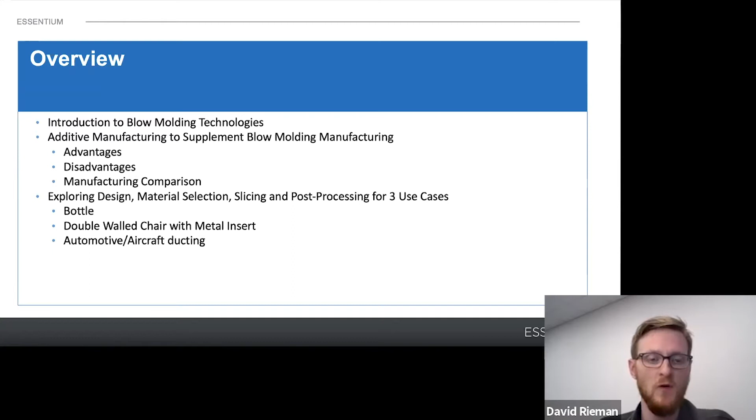So what is blow molding? It has been around for a while. In its simplest form, it is sort of the natural evolution of glass blowing. The first step that started getting blow molding running was in 1933. Low density polyethylene, LDPE, was invented. It wasn't manufactured and built until about 1938, where the material was much more amenable to the blow molding process. So in 1938 is when the very first blow molding machine is produced and able to start producing parts.

It doesn't really take off, though, throughout the 40s. There's a few people that are using it, but for the most part, it's not quite very popular. In 1953, high-density polyethylene is invented, and that's what really kicks off everybody being really interested in blow molding in terms of how it can be used for a variety of different products. That's where the industrial blow molding machines were first developed in Europe. And then those machines became available in the United States in around 1958.

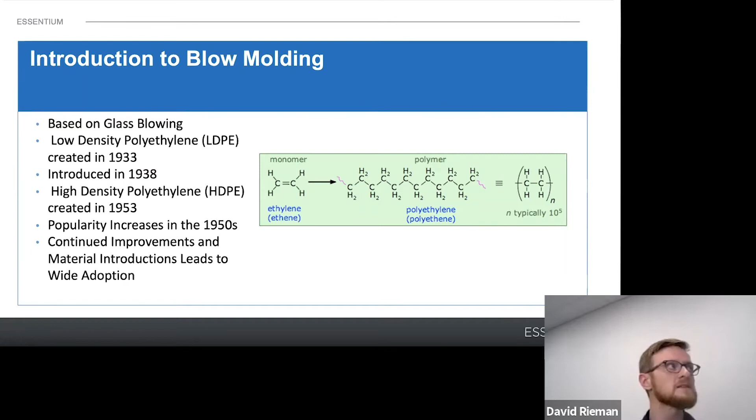So here is a breakdown of the different types of blow molding that we have. The most common is extrusion blow molding, where the material is... I'll get into that in my next slide.

But some of the main advantages of blow molding are that it's got very fast production rates. You can mold very complex parts at a relatively low tool and die cost. The molds will generally last the lifetime of your production cycle, as there's a lot less wear on blow molds compared to injection molding and other plastics manufacturing. There's a relatively low cost for high volume production parts, and the parts can be produced with a high strength to weight ratio. Parts can sometimes be reinforced with a lightweight foam core or internal ribs.

Some disadvantages of blow molding are that you're limited to creating hollow parts. It's also difficult to control wall thickness, and you have to take really great care in your design and equipment operation to ensure you get as close to a uniform wall thickness throughout your part as possible. Compared to injection molding, you do get poorer surface quality on blow molded parts. That's why, when we get to it later, post-processing is going to be such a key factor for anything concerned with blow molding.

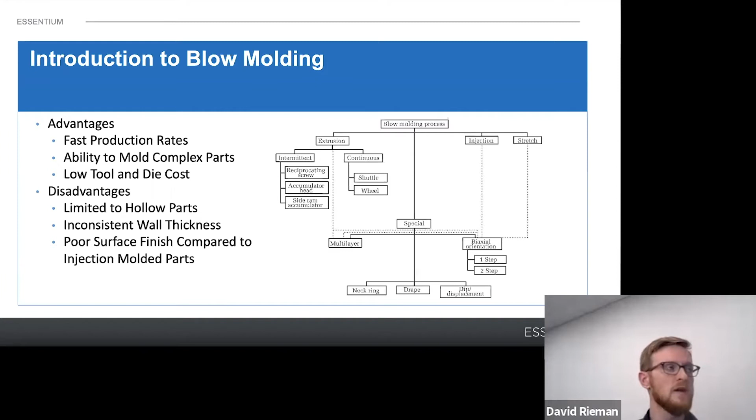Next slide. So this is the basics for extrusion blow molding. On the left, you see a picture of the basics of it. The resin comes in, just like with any typical plastics, and much like injection molding, it gets heated up and forced along an extruder screw, and that takes it to the die head.

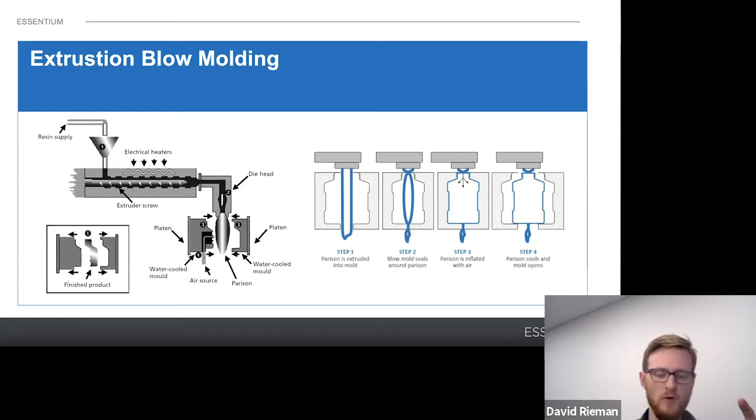At this point, the molten plastic is forced out through this die, and it creates an object called the parison. The parison is just a hollow tube of really hot heated plastic, and that is what gets grabbed by your molds. That's what the diagram on the right shows: the four-step process where the parison drops down, the mold grips it, and either through the top or the bottom, or sometimes even a hypodermic needle, air is inflated into the parison. As the air comes in, the part cools, then the molds release, and the part is ready to be used.

Next slide. So the next type of blow molding is probably the one that everybody is most familiar with. This is the process that makes all the soda bottles, all those PET bottles throughout the world.

In this process, much like that first step where the resin is melted, instead of being forced through a die head like before, it actually forms something called the preform. Some manufacturers produce a lot of preforms that can then be bought and used, and some machines will have the preform stage as part of the entire assembly line, where it makes the preform, rotates it over into the blowing phase, and then into the cooling phase for ejection.

So you can see here that on the left side we have the preform, and then it gets grabbed into its mold. If it's a machine that has preform-making as part of its process, the preform can often still be plenty warm, with enough residual heat that it doesn't need to be reheated. But if it's a preform that's been purchased, then it'll have to be heated back up. At that point, the core actually stretches down and stretches the part further, which helps create that uniform thickness that produces a really clean bottle.

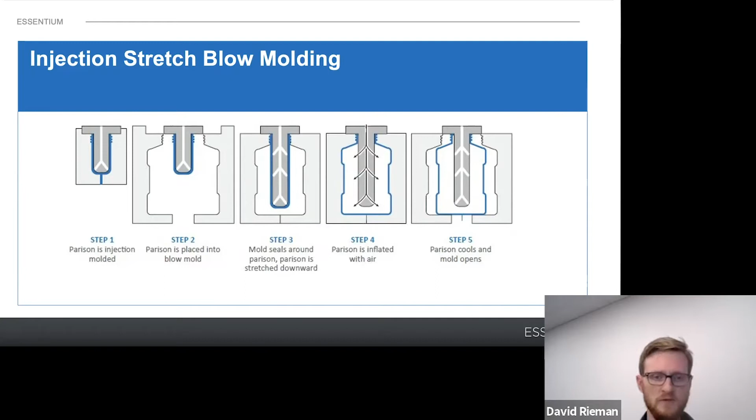And then after that stretching, the air is forced into it to fully expand it, and then the part is cooled, ejected, and released. Next.

Injection blow molding is essentially the same process, it just doesn't do that stretching part. It just heats up, or takes residual heat and applies air to produce the part. This is the least common form of blow molding, and it's limited in terms of its part size—you're typically producing really light parts.

Oftentimes they're used in automotive purposes or in medical devices for small little medical bottles. These are small, less than 100 grams, maybe 10 centimeters in diameter, 20 centimeters long at most, and they're made from a single layer of material.

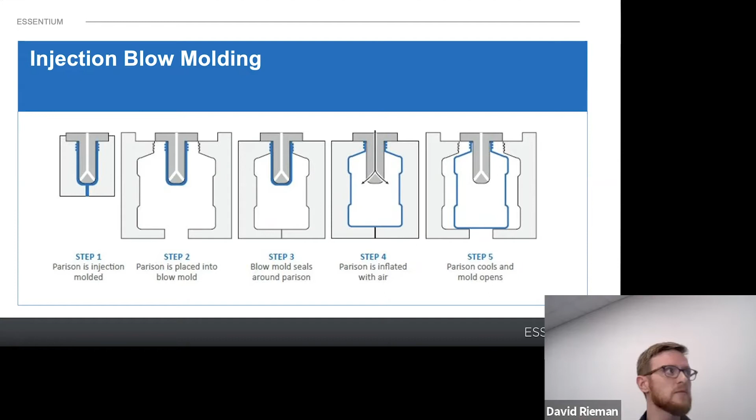Compared to extrusion blow molding, the tooling costs on a cavity basis for this type of molding are a little bit higher, since core rods and injection molds are all necessary for this process. This is also limited, as well as the injection stretch blow molding, in that you cannot produce anything with a handle—it all has to be a fully enclosed volume for it to really work.

So where does additive manufacturing fit in with the world of blow molding? There are some advantages for using additive manufacturing to produce the molds for blow molding.

Those advantages include being able to start printing as soon as your design is finished. A lot of times with traditional mold manufacturing, you have to work on a design team, go out to a manufacturer if you don't have a machine shop on your own, wait in line, and wait until you get that process to happen before you can start to see your work. With additive manufacturing, when you have a 3D printer on site, as soon as you have a good idea for a design, you can take it out, and depending on the size of your part, you could have it within a few hours to just over a day.

There's also a lot less machining time. When you produce a part from an additively manufactured mold, all you have to do is clean up those surfaces to get a nice, really clean surface—you're not going to be using a lot of machine time to fully cut out all the features on the part. And then the other biggest advantage is that the materials you'd be using for an additively manufactured mold are going to be a lot cheaper than the tool metals you'd typically use, like aluminum, or in some instances steel, for the blow mold.

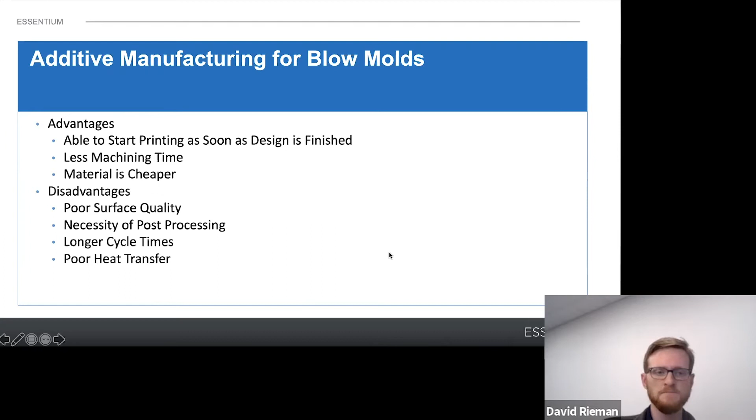With additively manufactured parts, because they aren't watertight with fused filament fabrication printing, you can't create those cooling channels in there—it would leak into the mold, and it wouldn't be good for you. So because of that, you've got those longer blow times, and you've got to periodically cool off the mold surface with air. That's definitely one of the things you have to keep in mind when designing and exploring the possibility of using additive manufacturing for your blow molds.

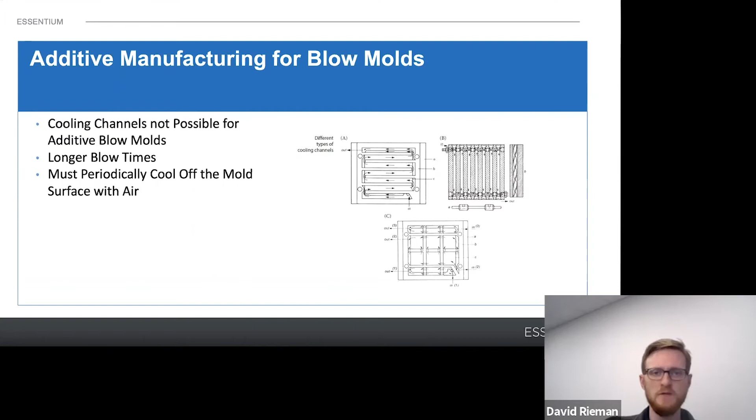So I'm going to go ahead and jump into post-processing. It may seem a little counterintuitive that you would want to address the post-processing before getting into the design, but it's actually going to have a direct correlation to some of the design decisions you have to make when doing your additive manufactured molds.

You really need a clean surface for a good quality blow mold produced part. The biggest area of concern after that nice, really clean surface is the parting line and the pinch point of the mold.

What we're seeing is that because these aren't metal -- I'll get to that on a later slide -- this also directly affects how you're going to design the size of your part, of your mold.

For traditional manufacturing, a lot of times you might get your desired part and then scale it up by about 4%, or just a very small amount, to account for the shrinkage that occurs naturally as part of the plastics during their cooling cycles.

With additive manufacturing, you want to go in the opposite direction, where you might shrink the part down because you're going to need that extra material that you can then machine away and get down to a clean surface.

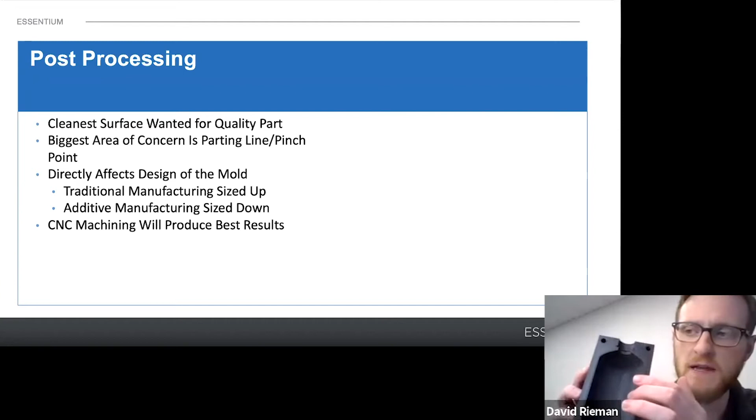You don't want to start at your desired size. For example, if this was going to be your final part, you wouldn't want to start with this -- you would want to scale it down ever so slightly to give yourself a few extra millimeters of material that you could then machine away so you can get to a nice clean surface.

And that goes on to what the best process is for post-processing these additive manufactured parts, and that would be traditional CNC machining. You can take a look, if you go to the next slide, please.

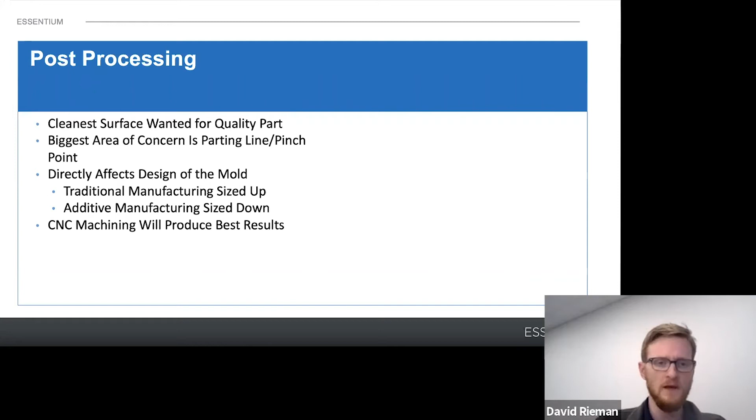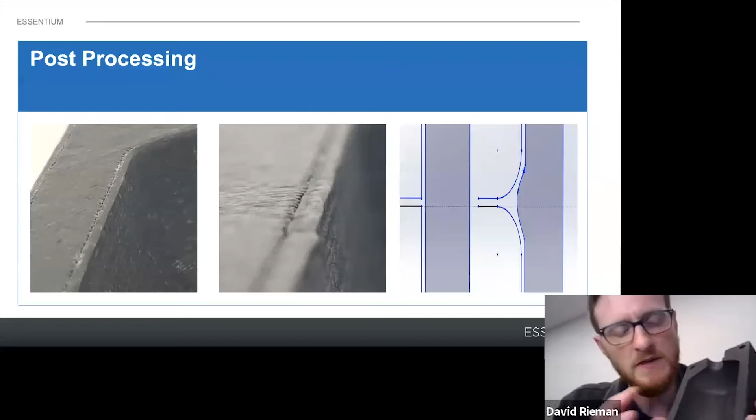Here you can see a part that's already been tumbled. If you can't quite tell in the pictures on the slide, this has just been tumbled in a media tumbler, and it did create a much smoother surface all around for this part.

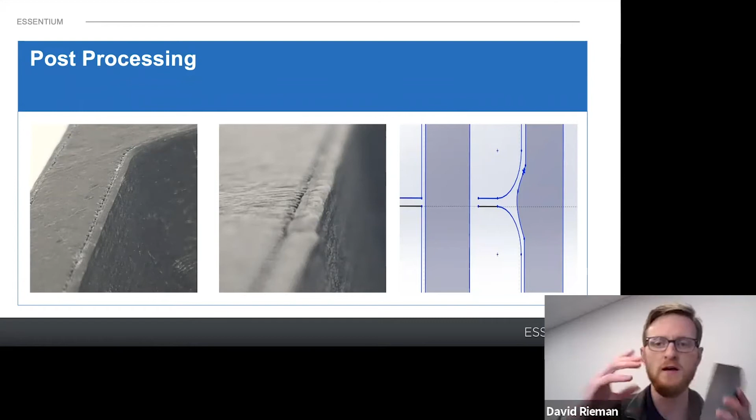But because of that constant tumbling and bumping and grinding that created a smooth surface, it also wore down the parting line. You can sort of see that in the two pictures on the left, where you don't have a really clean and sharp surface. The picture on the right shows what that results in for your part.

On the right picture, the left side is the ideal, where you have a nice, really crisp, clean, sharp corner and a good flush mate. That way, when the parison is blown to produce your part, you get a really good and clean flush parting line, without any defects.

If you were to try and use this tumbled part, you'd end up with something like what's on the right, where you have almost like a little dip or cavity. Once that parison starts to expand, it's going to want to fill in that void, and that's going to produce a bad quality part -- it can introduce defects. That's why traditional CNC machining is going to be the best solution for producing a great part.

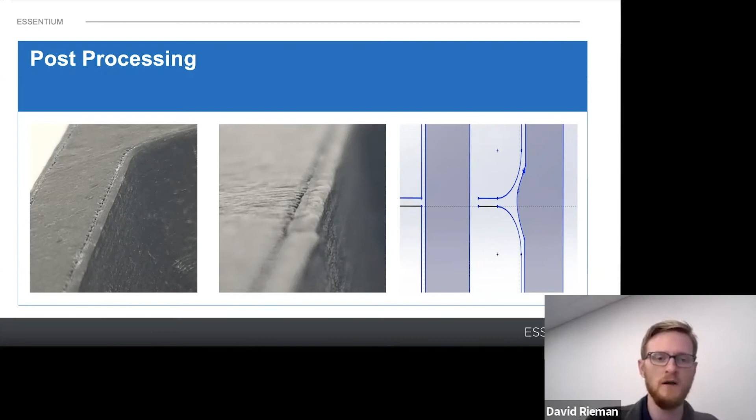Let's go ahead and jump back into some of the design things to keep in mind when we're trying to design parts for our blow molds. If you go to the next slide -- so, some general design rules.

Depending on the design of your part, you have issues where the walls get so thin that you might have a potential blowout, creating an ununiform thickness throughout the part -- so it creates a lot of possibility for defects and issues. That's why blow ratio is a really important part of designing it.

There are a lot of different formulas to account for how to calculate your blow ratio. But a lot of times with the modern blow molding machines that we have today, there are tools to help you calculate what your blow ratio is to make sure that you've got a nice, clean, well-designed part.

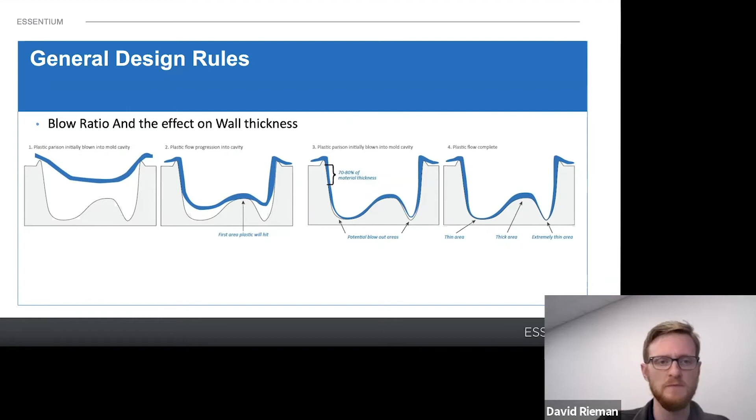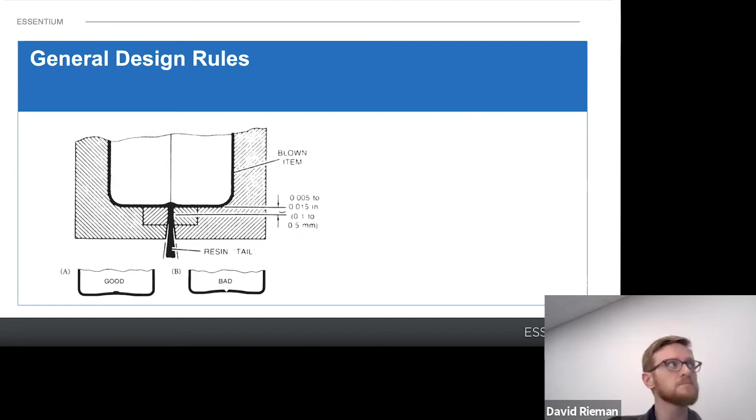So we're going to take a look at some materials we'll be using to create these molds. PET has a relatively low melting point compared to other blow mold plastics like polypropylene and PVC, etc. So when we're looking at PET, we can probably go with something that's going to be a little less expensive but still have good heat resistant characteristics. We're going to be looking at probably carbon-filled polyamide, PACF. That's going to be a great candidate for working with bottles and PET.

For if you're running polypropylene, those will sometimes be extruded at around 210 to 218 degrees Celsius. So we're going to be looking at HTNCF 25, a high temperature nylon that's also got a carbon fiber fill of 25%. These are other materials that Essentium offers that have other great properties. What's good about blow molding, because of the lower temperatures and lower pressures, you can really take advantage of being able to use a less expensive material, as opposed to if you were trying to do injection molding or other applications where you needed a more expensive, high heat, more exotic material.

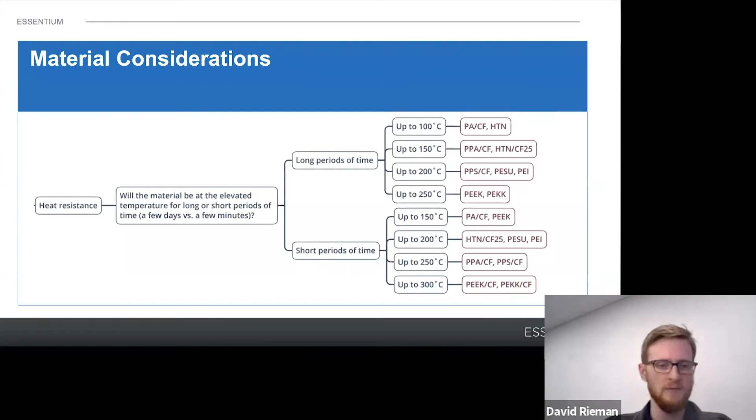So as I mentioned, this is just a simple bottle design that was thrown together for the purpose of walking through the slice settings for our first use case. As I mentioned earlier, PET bottles are some of the most widely used applications for blow molding. Plastic bottle production by blow molding manufacturers has drastically changed the environment of the earth.

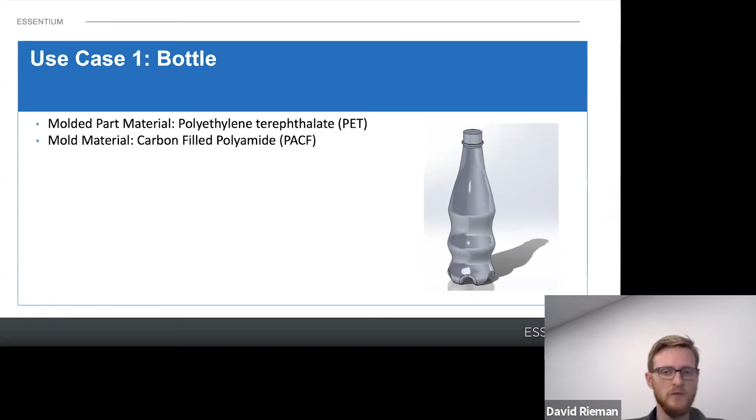Production has grown from 0 to over 10 billion pieces in just 20 years. So we're going to be taking a look at using that carbon-filled polyamide, that PACF, to create the mold for this part.

So on the left you can see the CAD model for this part. What you see on either side of the main volume are vents. One of the things to keep in mind when you're designing your molds is that as the parison is being blown to expand and produce your part, the air inside that mold has to go somewhere. So vent lines are drawn throughout the mold, typically at the deepest part of your mold where the material is going to reach last, and it'll be forcing all that air out as it goes there.

On the right you can see the mold as it's been sliced and simplified. What I used for my slice settings: I used 20 top and solid. I sliced these with a 0.8 millimeter tool head, so that's got a layer height of 0.3 millimeters. To get a good solid 6 millimeters or so of solid surface, I went with 20 top and 20 bottom solid layers, and I'm running 8 perimeter shells to produce a really strong part.

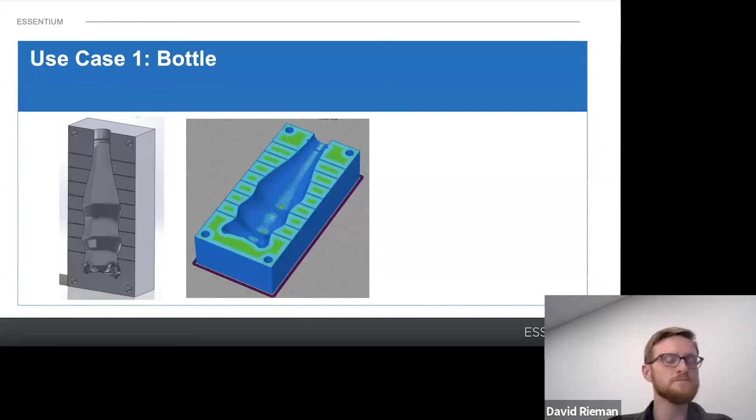Next slide. Here is another example of a part that we can produce. This is a double-walled part, going to be like a seat. Not pictured here is that at the bottom of this part, there are going to be 4 threaded inserts to allow you to attach it to a metal frame.

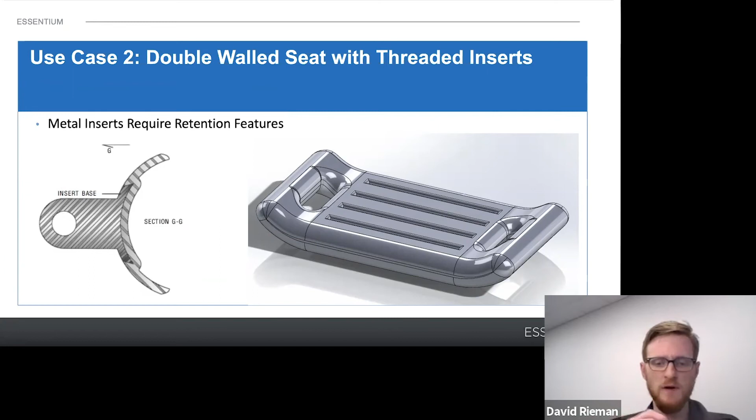What's great about, or one of the things you can take advantage of in blow molding, is that as the parison gets blown and expands, it will be able to actually grab around things that are in its way. This is a very common practice. Threaded inserts are designed like the picture on the left with extra features, a bit of a bigger base, so that as that parison is blown in after it's heated up, it grabs onto and holds those threaded inserts in place, so you can have better mechanical properties for the part. Next slide.

So blow molded hollow parts can be modified for specific use cases. Parts can also be filled with polyurethane foam or expanded beads of polystyrene. You can get benefits for kinetic energy dissipation and deformation resistance. This is done a lot of times in the automotive industry with filled bumpers.

You can also adjust the comfort of the part in terms of how much give it can have. There's a lot of areas where double-walled parts can be modified and adjusted, where you can run very far with how you design it, and really push the limits with additive, because you have this plastic part that costs a lot less money and has a lot less time to produce. You can experiment a lot more with an additive produced blow mold part, versus having to wait and spend a lot of money to get a traditionally machined part.

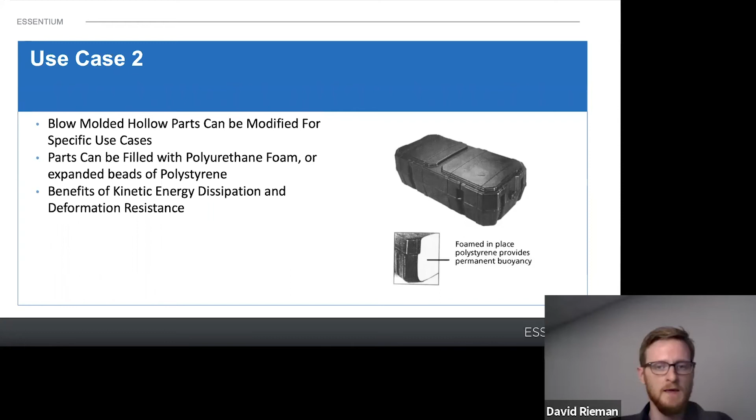Next slide. Here you can see in the middle a quick slice of it. These are, again, the same settings. At the top left of the middle picture, you can see where I have the start of my parting line and my pinch point to catch all the flash. But you also see those crash pads at the top left and top right of the part. On the very left of the screen is a slice a few layers down beneath those 20 top and bottom layers, where you can see the infill.

What the crash pads do is, as the molds come together, in order to keep some of the pressure more evenly distributed so it's not all entirely pressing on that pinch point and possibly even damaging that thin piece of material, you want to help distribute the load. Because even though the pressure the parison is putting on the part when it's being blown is fairly low, you have to keep in mind that the molds have to be pressed together at a pretty high pressure, so they need a lot of strength there.

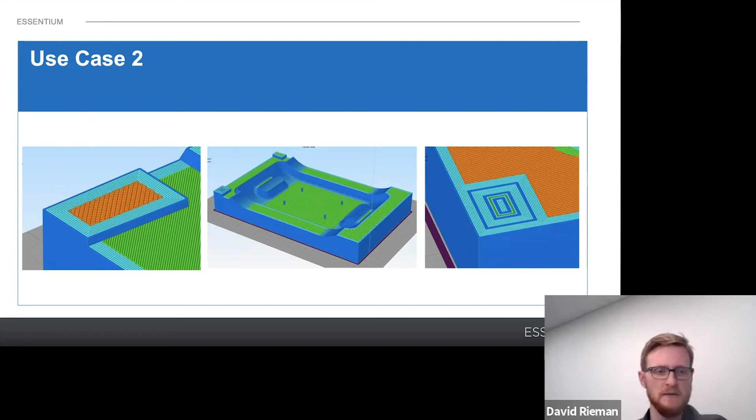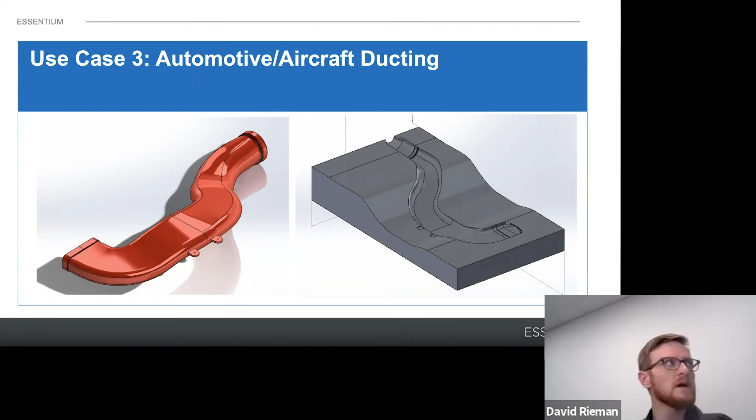If we go to the next slide, again you can sort of see here the importance of the post-processing. You can see on the picture on the right that you have those lines where the curves are, because this is being sliced with a 0.8 millimeter head in order to produce a faster printing part, because otherwise, even a part this big, it's going to take a lot of time. Trying to slice it with a smaller nozzle would get you a cleaner part quality surface finish. However, you have to weigh that against how long it's going to be in there printing.

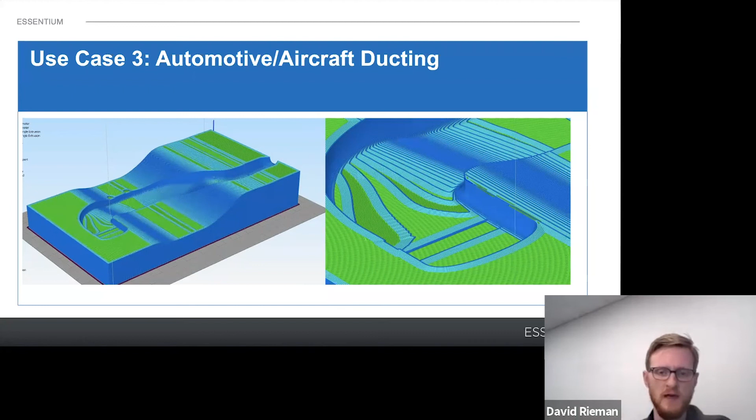This part, you can see on those curves as it's coming up, it creates that tiered effect. This is where that post-processing is going to be very important, and why you want to go to traditional machining to do that. You could possibly go in with hand tools and try and sand it down yourself, but you're going to get a much cleaner and much higher quality finish with traditional manufacturing.

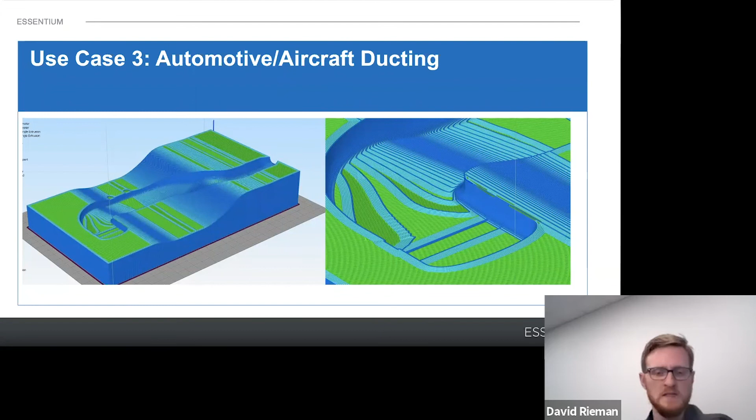Next slide. So as I mentioned, that duct mold was about 610 millimeters by 350 by 100. A similarly sized part in aluminum would probably be about $20,000 to $25,000 with 4 to 5 weeks of lead time. Because this part was imagined as being like a polypropylene duct, we went with that HTNCF. The amount of material was roughly 12 kilograms after the final slicing, and that's just because it has that 6 millimeter shell all the way around it, those 20 top layers, those 20 bottom layers, and the 8 perimeters for the part, as well as those fully solid crash pads on all the corners and in the middle, to help evenly distribute weight off of that pinch point.

The print estimate for this one was a 3-day print per mold half, and maybe 1.5 days of post-processing for the second half. So after 3 days, you get that first mold half, which you can give to the machine shop to start post-processing, cleaning up the surface finish and making sure you have a nice, clean parting line and pinch line. While they're machining that, you can also have your second mold half printing.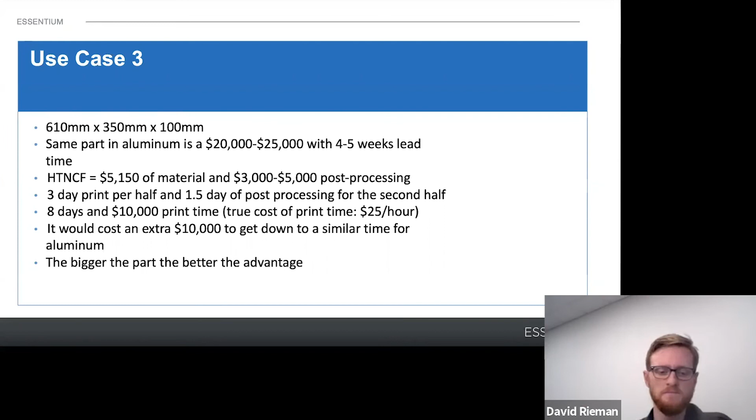Another thing I'd forgotten to put in one of my slides: typically you might have a pinch point for a parting line be maybe 80 thousandths wide when it's made out of metal. But because of the poor heat transfer for these additive parts, what I was playing around with was doubling that up, creating an extra 160 thousandths essentially wide, so about 3 millimeters wide, for an additive part versus traditional manufacturing.

In conclusion, where additive manufacturing and blow molding go together is that you get a huge reduction in time and cost. It's ideal for prototyping and low quantity production when you have those legacy parts that aren't made anymore, that would cost a lot of money to go back to the OEM and have them produce, or for just a very small production run.

You can really see the benefits where additive doesn't replace traditional mold manufacturing, but can help supplement it, and allow us to really explore everything that we need.

So at that, I'll go ahead and open it up to questions.